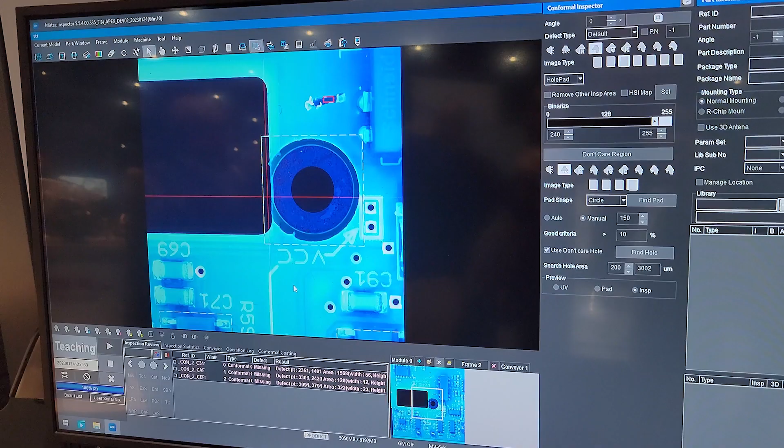It does have a PCB flipper in it. Conformal coating is typically an offline type of inspection, right? So you conformal coat the top and bottom of a board. Once that board is in the machine, we can inspect the top side, flip it, and do the bottom side, and then have the board exit. There's a couple of different ways of doing that. We also have a Z-control, which is our Z-axis multi-focus imaging system.

Basically, we're looking for conformal coating. We're looking for bubbles, coverage, and non-coverage. When you say coverage, it's like we want to make sure everything's covered on the board that should be covered. When you say non-coverage, you want to make sure those things on the board which are not supposed to have conformal coating don't have them. So you're looking for splashes and things like that might occur. Exactly. And you're looking for tight line definition, which is important in conformal coating. And one of the other areas is on the edges, because you want to make sure you're covered on the edges, because otherwise you can get ingress underneath the actual coating itself.

Can you check for that as well? One of the things we have on this machine as well is an 18 megapixel CoaXPress side camera system, which is really useful for dealing with certain different devices, whether they be tall devices or anything along those lines where you can't really see it with the top-down camera. So that's another feature as well. We've got not only the standard 15 megapixel top-down CoaXPress camera, but we have 18 megapixel side cameras, 4 of them for doing conformal coating for sides of devices and also edges.

The main thing with these machines here is you really want to be able to make sure you check very good for coverage and non-coverage. It gets a little bit tricky sometimes when you're dealing with shadowing of different devices, and that really comes down to the lighting, and that's one of the things Mirtec does offer, since we manufacture all of our own hardware. We've always focused on being the most technologically advanced company out there. That's what we do. And this machine right here, currently the way it exists, is the most technologically advanced 2D conformal coating system in the world. So that's important.

Okay. But with us, we've brought our MV3-Omni desktop 3D AOI. Best desktop 3D AOI system on the market, on the planet, quite frankly. This year, we grew by about 22.6%. Now, believe it or not, I'm going to throw in the 0.6% because we earned it. But really what it comes down to is about 45% of our business this year has been desktop sales. Really? It's done very, very well.

Interesting. Part of the reason why it's done so well is because we use the same exact hardware that we use with our MV6-Omni, which is kind of our flagship product. So the MV6-Omni is here as well. They both share the same hardware configuration, so programs are 100% compatible between the two. We also have our SPI system here, which is our MS11. That's another award-winning product line that we have. And then we also brought our Genesys pin machine.

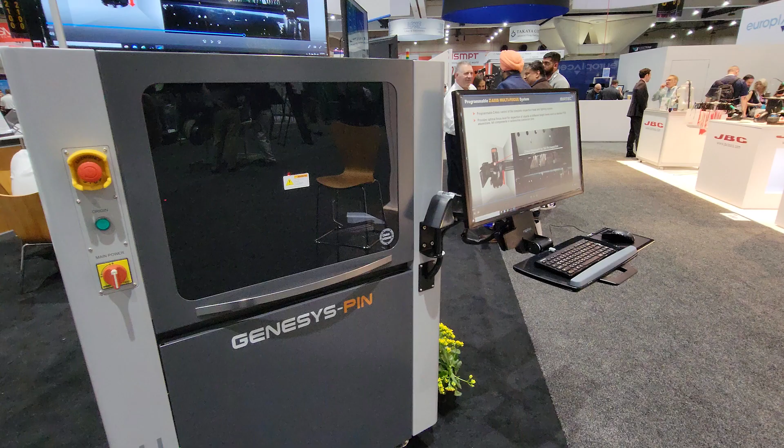So the Genesys series is a separate series. The pin system was designed specifically for automotive manufacturing. Yeah, for the pin insertion. Pin insertion, but it also does 3D for SMT parts on that board as well. It's an awesome system. What we could do on that system is we can measure up to a 50 millimeter tall pin, which I believe is the best spec out of any of our competitors.

So you're looking at the planarity of the pin to make sure it's absolutely straight. Or in the case of a tall component, to make sure it's not moving. We want to make sure there's no pitch, no splay between. If you have a multi-leaded connector, from the top of the lead to the shoulder, we want to make sure that that's correct. Of course, you're looking for missing pins, anything that's bent. Bottom line is with these automotive boards, you're taking these male connectors and mating them with female connectors. So they have to be right on. Otherwise, you're not going to be able to do that.

Right. And that is a big problem, especially if you're dealing with a 50 millimeter tall or a 43 millimeter tall pin. Very easy for them to get bent in the manufacturing process. So that has to be inspected very accurately so you can manufacture the automotive electronics correctly. Otherwise, you're going to have to go back and bend everything back. Yeah, you're going to make sure they mate correctly. And so, do you do that inspection from the underside? Actually, we can do that with that system as well.

We have a flipper. The flipper is the main thing that we just introduced this year. We have a flipper available on our MV6-Omni, on the Genesys pin machine, on the Genesys CC machine. That's important because a lot of times you want to be able to do both top and bottom while you have the board in the machine. That's really the best in not only flexibility, but also efficiency. So we could do top side and also bottom side.